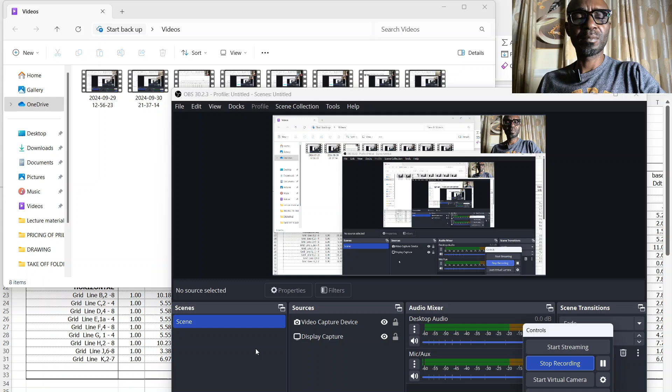Hello, we are here again in furtherance on how to use Excel to measure quantities.

A recap on the last video: we dealt extensively with the footings, and for the purpose of emphasis, we were able to extract the formwork, concrete, excavation, working space, backfilling, blinding concrete, and the excavation for 3 footings on the drawing that we are referring to. We also touched slightly on the trenches, which I feel we needed to discuss further for clarity, so that you can apply it and see if it is working.

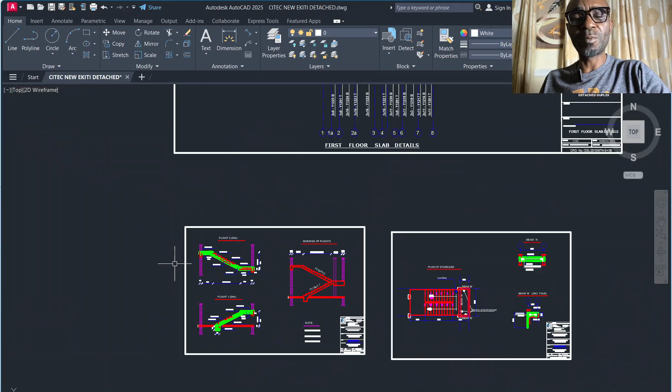We have a drawing that we're referring to, which is a duplex. As you can see, the drawings are gridded, both vertical and horizontal, and I was able to scale all the measurements of each of the grids for ease of reference.

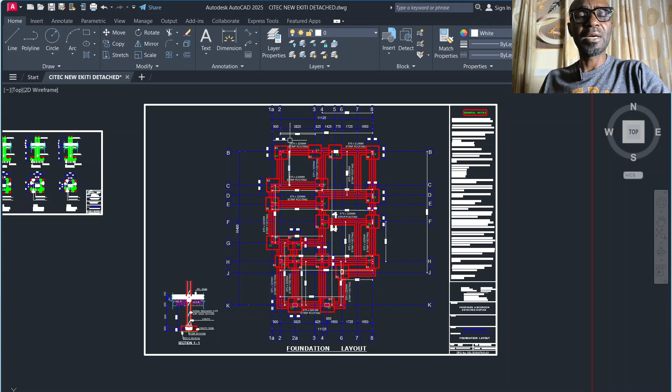We are going to start with the verticals. As you can see, we have grid 1A, spanning from C to G, and the length is 6.15. It has a B2 footing, with 3 B2 footings: 1 at the center, 2 at the extremes.

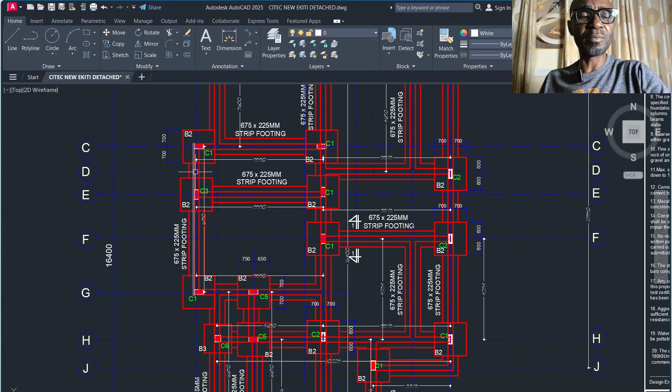For me now to get the length of the excavation of my trenches, I need to take half of this footing off at the end, and I'm taking all of this. Then I'm taking the working space of 600 to arrive at what I'm going to dig here.

Then for the block work, I'm taking half of this column to bring me to the edge of the column, and I'm taking half as well on the other side, and taking away all of this, because this portion will be occupied by the column going up, so the block is not going to go through. After deducting this, I'm going to get my clear length for block work.

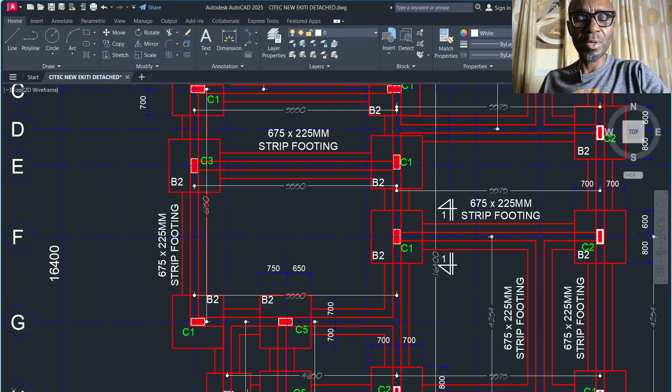Let us go to the drawing. This is 615. I have the column thickness, which is 150. I divide by 2, giving me 75, multiplied by 2, I have 150.

Then the column at the center is C3, which is 350 by width, so I took out this. Then I will arrive at the length of my block work, which is 5.65, as against the 6.1 that is on the drawing.

Then for my base deductions, I have B2, which has two halves, one at this extreme, one at that extreme, multiplied by 2, plus the one at the middle, plus 1.4, gives me this one. Then the working space is 4.

I'm deducting working space; the middle has 2, while the two ends have 1 each, that's why it's 600 multiplied by 4. Then this is what I'm deducting from 6.15, so what I'm left to dig is 0.95.

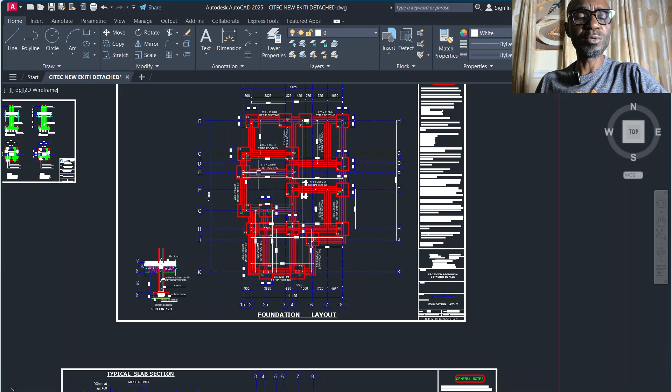Then grid 2, there is grid 2, which is B to C and G to K. B to C has one B2 column, one B2 footing at this end, and another B2 footing at that end.

So I'm taking out a 700, I'm taking out a 700, I'm taking out a 700, I'm taking out a 700, then I'll be left with...

Then I will now take out 600 for the working space, and I'll be left with what I'm going to dig here.

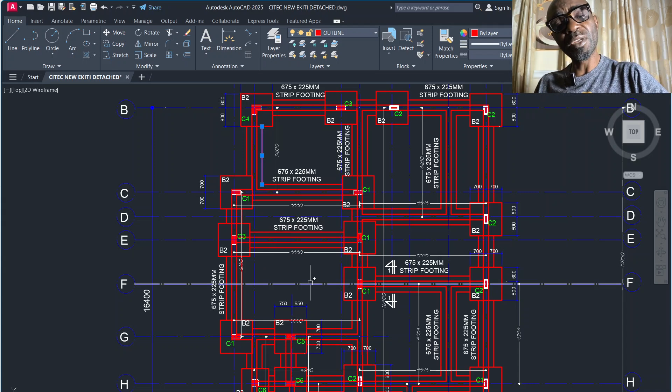Then equally on this other side, which is grid 2, G to K, I have one B3 at the center, and I have one C6 at the center. So I'm going to take out half the thickness of the column, half the thickness of the trench, and the full width of this and the whole of this column to get my block work.

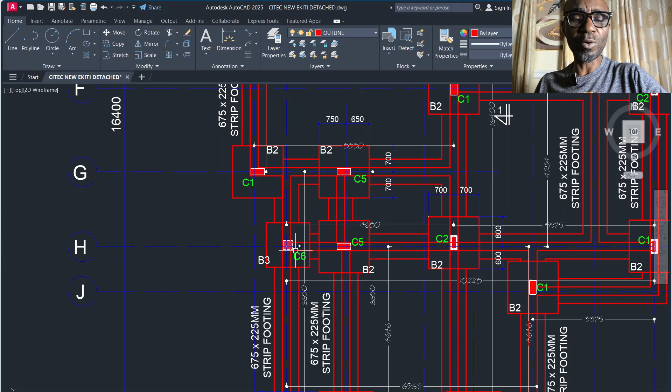If you come to grid 2, you see 3.6. I'm taking 0.75, which is the thickness of the column. Then I am taking the whole of the column at the middle, then I am taking the block work.

But it's supposed to be, let's see if I am correct. I'm supposed to multiply by 2. Right, I'm supposed to take 225, half there, half there, so I'm having 225. This is the same for B. Sorry, we're correct. Then this is for G to K.

GK. I have I'm supposed to take I'm having

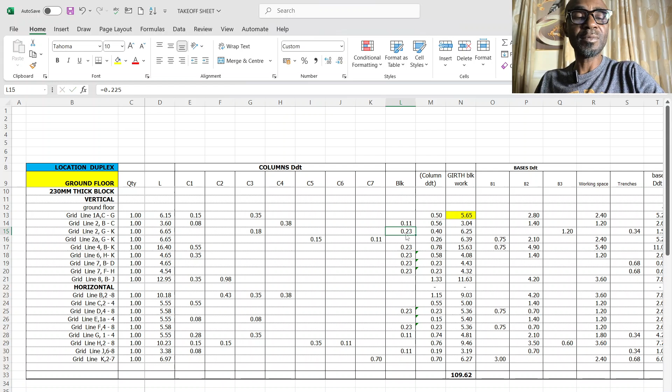I'm deducting this, so I'm left with my length for my block. Now it is 6.3, 6.39, as against 6.5, 6.65, while my excavation is 1.4. What is remaining is 1.4 to be dug in that axis.

So it is the same thing applicable. This is my own approach. You can approach it the way you have analyzed the result you want. So if my approach can be made easier by your own approach, it is good and fine.

It's just like a guide for you to understand what I am doing. Having said this, we'll quickly go to the other information. As you can see, I have the width of the trench here, the depth of the trench here, the height of the block here. Why is it different from the depth of the trench?

Because this is the depth of the trench, I took out the thickness of the strip footing, which is 225. I added 450, meaning that the building is going to be above the natural ground level by 450.

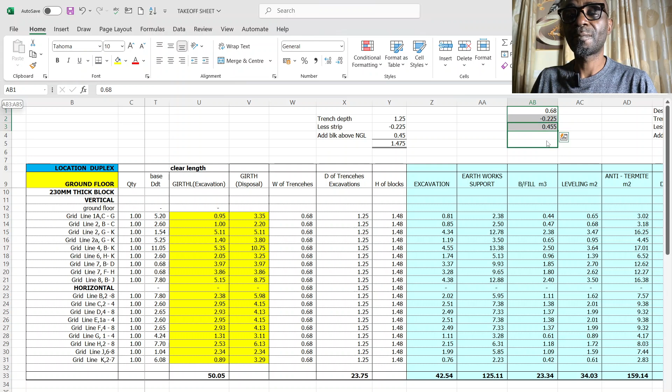So this is the backfilling of the two sides of the block where the block work is running through.

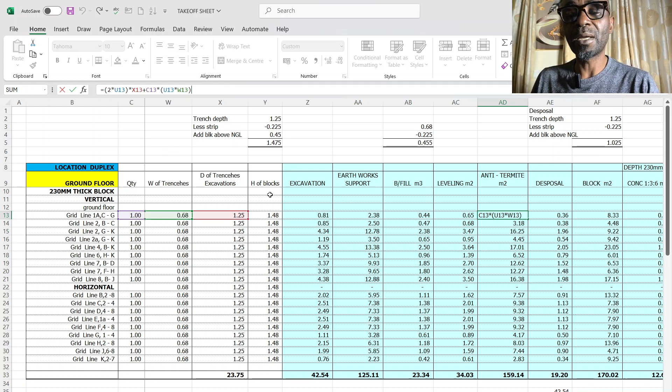Then level and compacting is, of course, the length by the width. Anti-termite is the bottom and the two sides, which I took time to explain the formula for during the pit excavation.

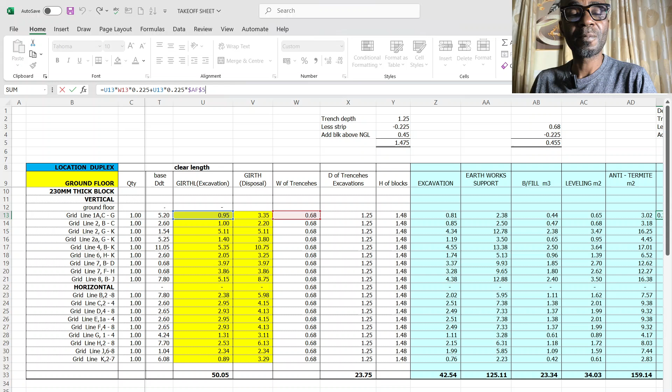Then disposal, it is now the strip, this length by this one by 225, which is the size of block, which is the thickness of the block, to get your disposal.

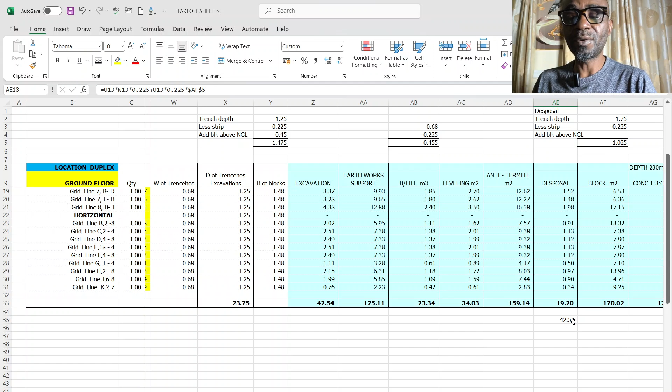So as you can see, if you drag your formula, if you add this to backfill, you should be able to get 42.54, meaning that you're correct because it is the exact quantity that you excavated.

And now you're taking the block, the area the block and the column, the concrete strip, is occupying, and you're taking it out of the site and disposing of that.

So now, having done this, let's quickly go to reinforcement, which is what we want to discuss extensively for today.

I did say that if you're given a bar bending schedule, you might be lucky to be given one where you just take the overall length, multiply by the quantity, and get whatever you want. But a situation where you're not given one and need to show all the workings, you must show how you arrive at the overall length and how you did the working using Excel.

I know we all know how to do that using the manual method, but using Excel is what we are going to be discussing now.

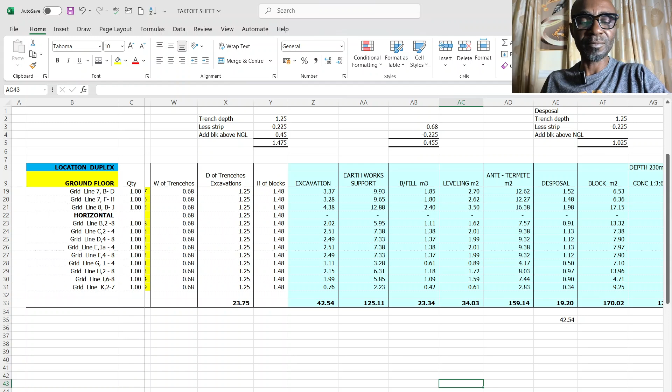As you can see, I have my calculation sheet where I have B1, B2, B3. Then I have the columns C1, C2, C3 up to C5, up to C7.

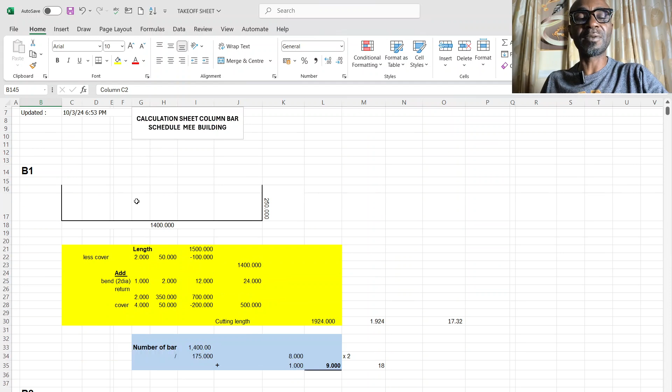What I did is first I draw the base, which is going to be your border line.

I draw the base, which is equally what is here. Then I create this calculation area where all I need to do is go to the drawing.

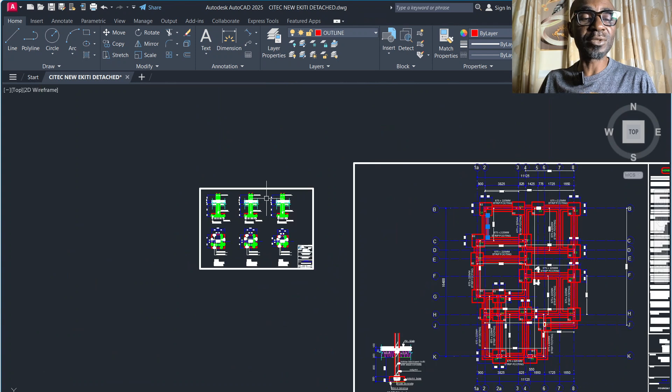What are the sizes of the bases? We have 1.5, 1.4, 1.2. So I go here, I bring the first, B1 is 1.5. I put 1.5 here, and the cover information says foundation cover is 50, column is 40.

I put 50 here, I put 50 here by 2. It gives me minus 100 from 1.5, gives me 1.4, which is the effective length. I click it, I bring it here, I get this.

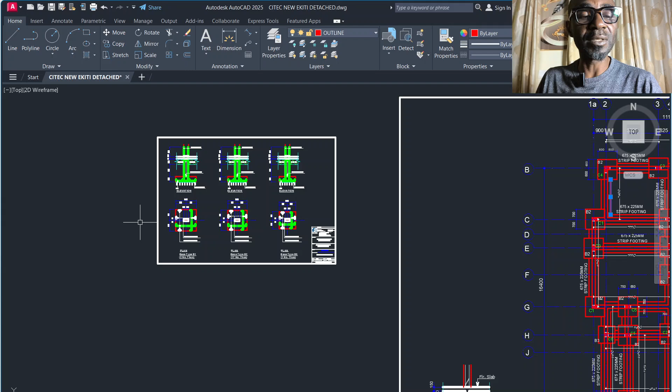Then now for me to get the upper return, it is 2 by 350. It is 350 here, 350 here, because the thickness of the base is 350. I have 350 here, 2 by 350, 700.

Then I'm taking out cover for 4 places, because one up here, one up here, one up here, one up here, making 4 by 50 gives me 200. So that is 700 minus 200, gives me 500.

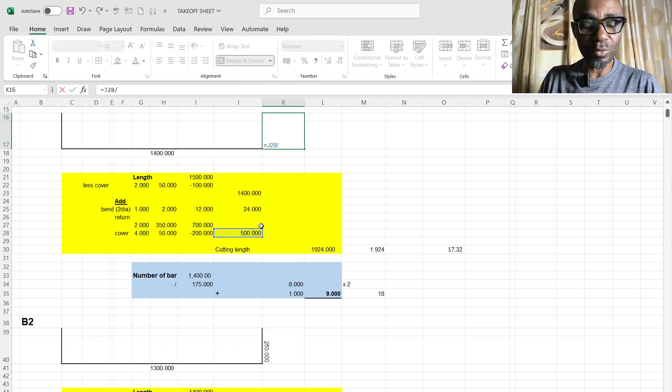500 divided by 2, I have 250 here, 250 here. If you do your manual computation, you'll see I am correct, because 350 minus 100, you're having 250. Then I link this by this, I divide it by 2 to get this.

Then for me to get the number, since it is a square, it is a square reinforced footing, I click this, I took this effective length now.

Then the center to center is 175. Divided by 175, I have 8 plus 1, making 9.

If the footing size is not the same, say let's say this one is 2 meters, let's say this is 2 meters, then the only thing that changes here is this one. So now we are going to have two different numbers, because the footing is not the same.

It's rectangular, one side is longer than the other, so you cannot multiply by 2 in this manner. Since it's a square both ways, that's why I got this size and multiply by 2. But since it is now rectangular, you have to have 2 different bars, because their lengths are not the same, and even their quantity will not be the same. So you have this. But in the case of what we are dealing with, it is the same.

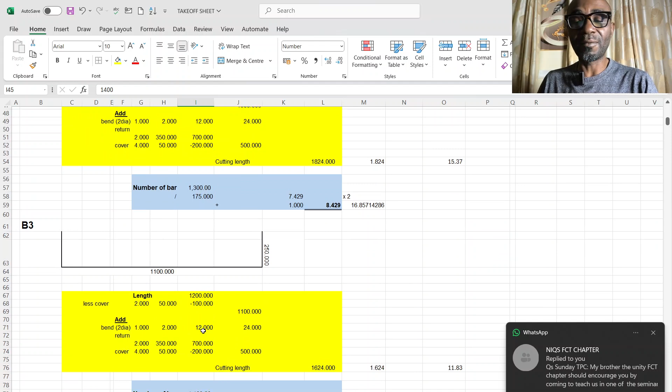So I delete this back. I click this, I pick this now. The same thing I did on B2, 1.4, which is the length, I have this. Then I have 1.2, I deduct this and have this, and it is both ways.

Then for me to draw this, I just want to show how to still draw using Excel to draw your shape. Take this out. What I did is you drag this, you close the cell so that the other one can, you just go to your border, pick the size of what you want.

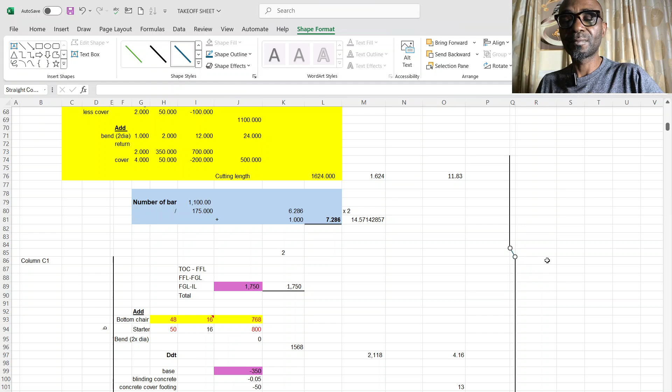Okay, then you come up here, pick the size, then you go to your insert, you check shapes, pick this. So you can see you already have your shape of your reinforcement.

So you can use Excel to sketch some of the things you want to illustrate, you want to project, so that the person interpreting your document will actually know what you're doing.

Then, having done this, we'll now come to the column. The columns now are this, you go to your drawings. The columns are going to project a starter, you're going to have starters above.

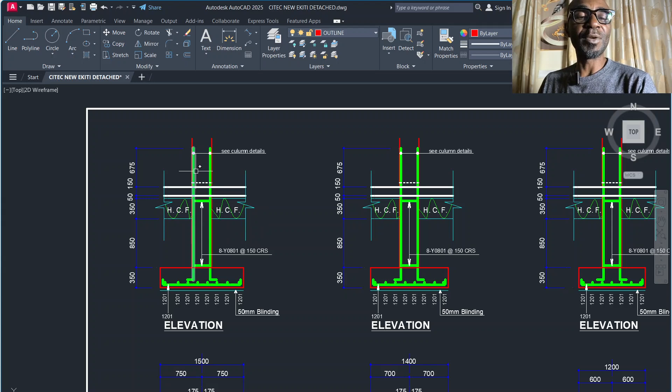Here they told us what the starter will be. But in the case where you need to use the conventional formula to get your starter, it is 50 by the diameter of the bar.

So now, if you're not given this return length, there is a universal formula you can use to get your development length: 48D, meaning your measurement for the steel will take effect from the top of the concrete here up to the top of the concrete there. Then for this, you use 50D to get your starter. Everything inside the concrete to the chair, you use 48D.

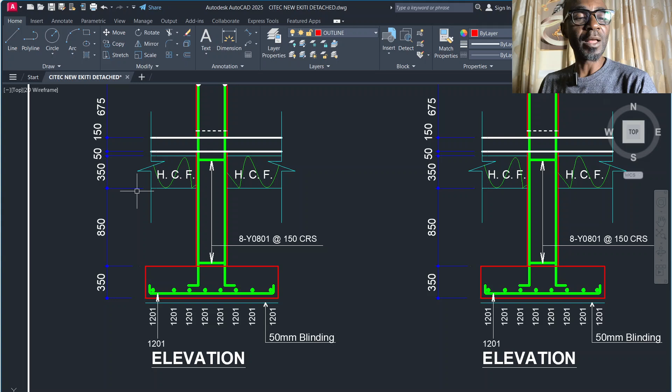So let us go to the sheet. From invert level to floor ground level, the length is 1.75. For the bottom chair, I'm using the development length of 48 by 16, while the starter bars are 50 by 16. I have this.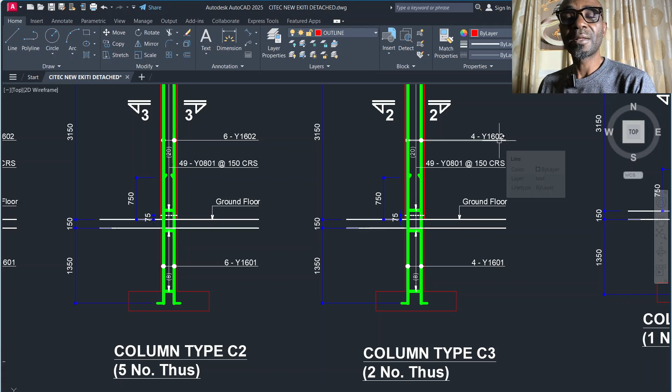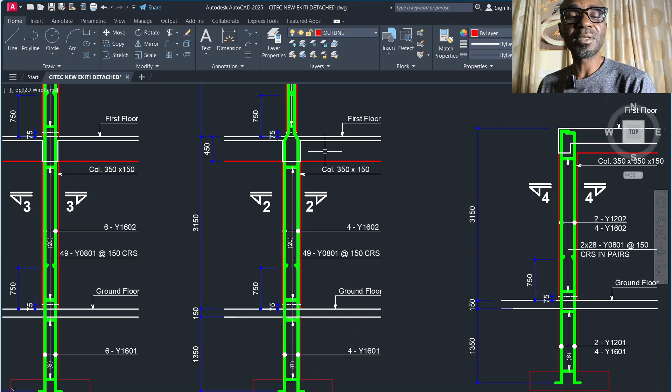They are all 16mm diameter bars. Here they are saying 4. Why are they showing us 6 bars here? 1, 2, 3, 4, 5, 6. So there's a discrepancy. For C3, they are using section 3, section 2, section 5.

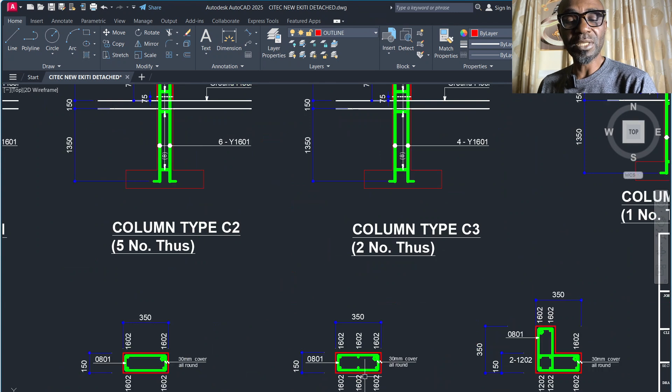3 is C2, C3. So if you have such discrepancy, you need to get clarification from your consultant, because this is section 2.2, this is section 3.3. Meaning for column type 2, we have this section, which is 3 bars, and for column type 3, we have 4 bars.

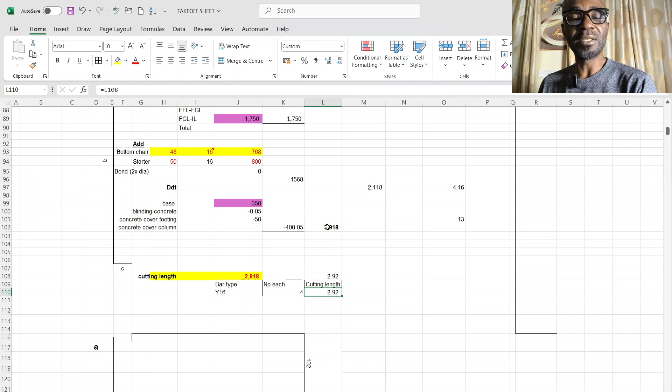So there's no discrepancy. Now we come to this place. I have 4 bars, and the length is 2.918. Then I come to the stirrups.

The stirrups are 350. I have 350 here. I am adding the bent, which is twice the diameter. The diameter is 8mm. So minus that, then you less the cover of 40, twice 40, you have this for the longer side. Then for the depth, for the other face, I have 150 thick.

Then I deduct all the deductibles. Then I am supposed to add the bent. So I add bent, then I less covers. I now have this length, multiply by 2, I have this. Then I have this return, which is this portion here, 2 by 50 is 100. I add them together, I'll have 908 as the effective length.

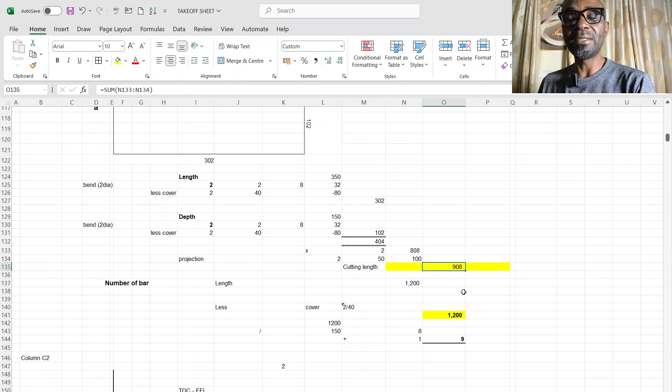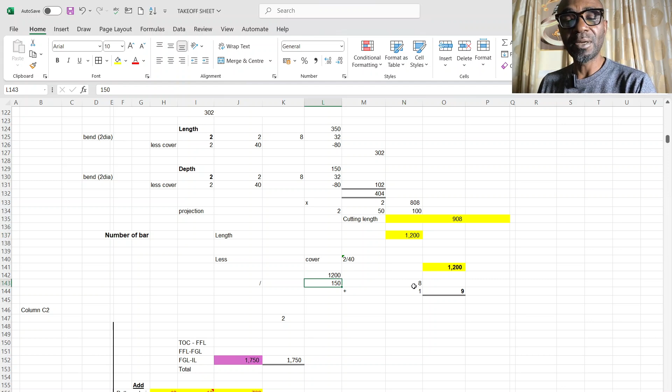Then here is the span where the stirrups will occupy, that's 1.2. At a center of 150s, you have 8 plus 1, making 9 numbers. So the same thing you repeat on all the columns.

So if you understand this, you can do the rest of the columns. What I did is, first I got this length, from top of the ground floor to the bottom of the footing. Then I added the starter, I added the development length. I deducted the thickness of this column, the thickness of the footing, took off the cover, and took off the PCC, and arrived at the length.

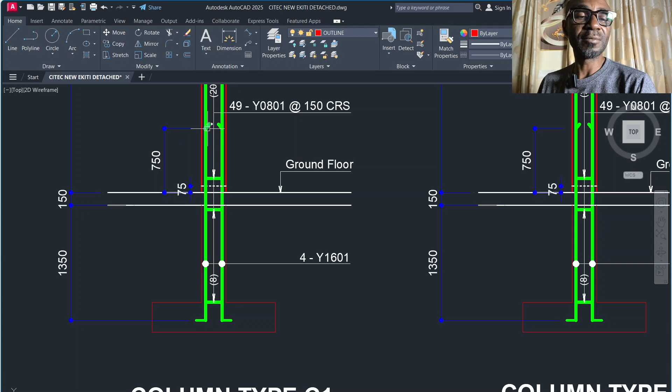Here, see, there are discrepancies. They are giving me 750 as the starter length, while on this area they are giving me 675. So there is a discrepancy. But for this exercise, we are only trying to educate ourselves on how to extract this and use the conventional formulas to get some of the missing information that might not be on the drawings.

Like if the starters are not given, you have a conventional formula to apply. If the bottom here is not given, you take the development length from... I'll give you an example. This is my footing.

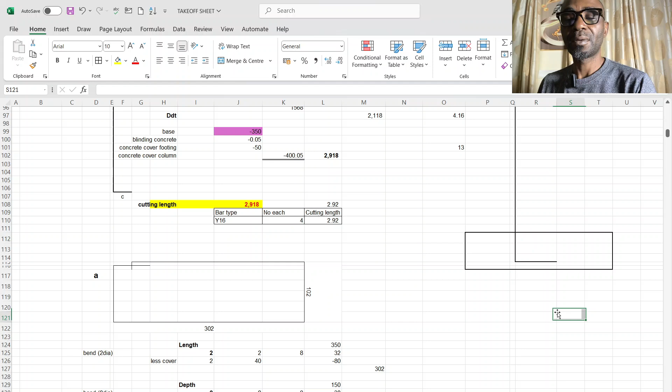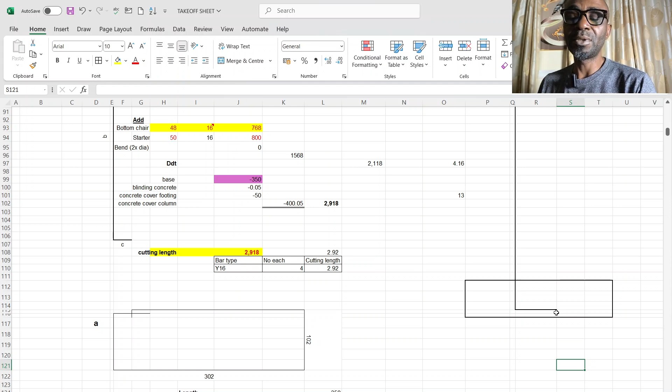This is my footing. I'm supposed to take my effective length from here to the top of the grid slab. Then I will use 48 times D by 48 to get from inside the concrete up to this point. And that is what I got here.

So now we'll go to the bar bending schedule. If you're working on projects, there are times you're expected to submit your bill for payment with backup documents - all the measurement sheets, checklist, bar bending schedule for proper checking. Imagine if you needed to submit your backup sheet and prepare a bar bending schedule, doing takeoff manually - you can imagine how taxing and difficult it will be. If there are errors, you start cleaning or rewriting, using your calculator to punch numbers. But with Excel, as soon as you discover any error, once you correct it, the whole thing will be corrected instantly. That's why it's good to learn how to apply Excel in measurement.

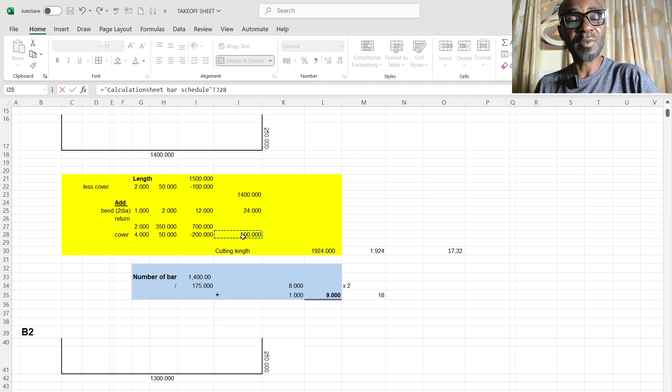So now I draw the same shape. I press equals to, I go to my calculation sheet. I pick the effective length here, then I come to this area, I pick the 500 divide by 2. I have 250 this way. Then I click this side to pick this same 250 here, and I go to here, the number of footing, base 1.

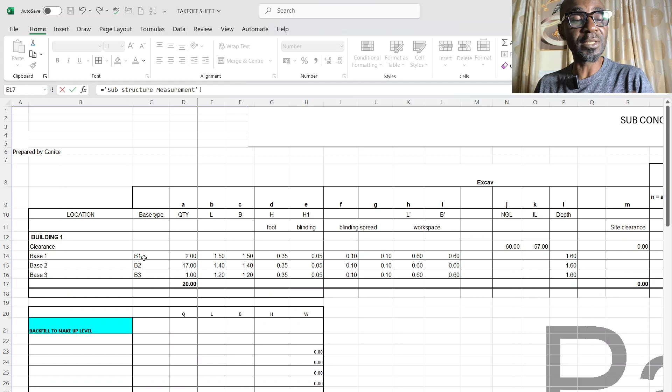Where do I get it? I have to go to where I measured my base. Where I measured my base, we said the B1 quantity is 2. I click 2. Then how many bars are in one footing? It is 18 because it's both ways - 18 as against 9. If it's 9, I have to multiply by 2. So 18. So I have my 250 this way, then this one, then my effective length as 1.9. The total length is the number of footing multiplied by number in each by 1.9.

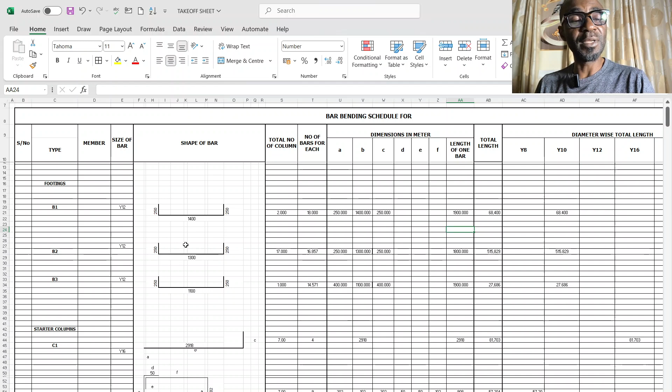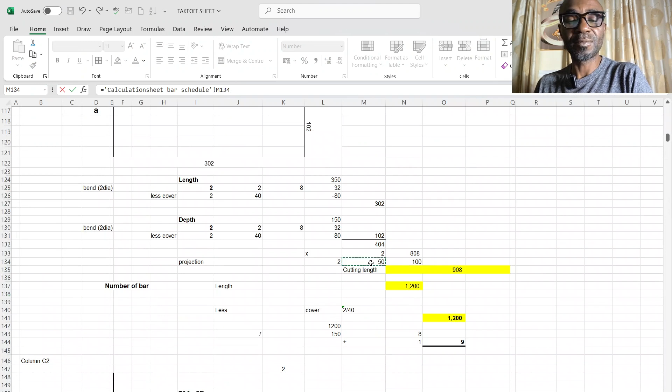So the same thing is repeated in base 2 and base 3. Then you go to your column, you pick this effective length, your stirrups, you pick the effective length, then you pick your 50 here, which is the return. So now you have all of this. This one twice is reflecting here and here. This one and this one is reflecting here and here. Then your returns this way and this way is reflecting 50-50.

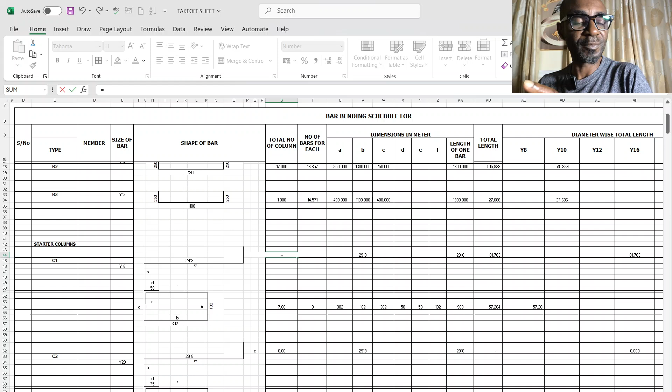You have effective length of 908, and the number of columns are 7. You go to where you measure your column. C1 is 7, you click. Then how many numbers are the bars? You go to your foot 1, it's 4 numbers. You click. So this is what you repeat for each one.

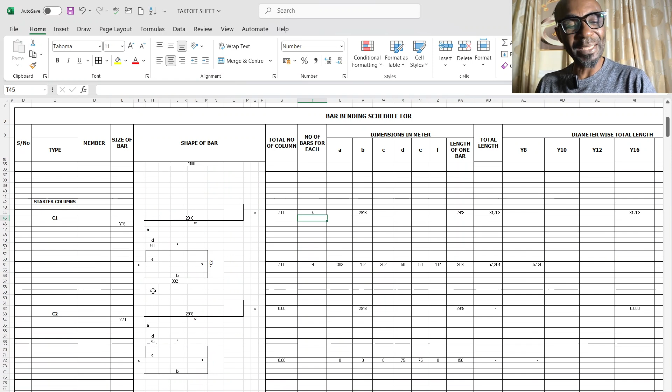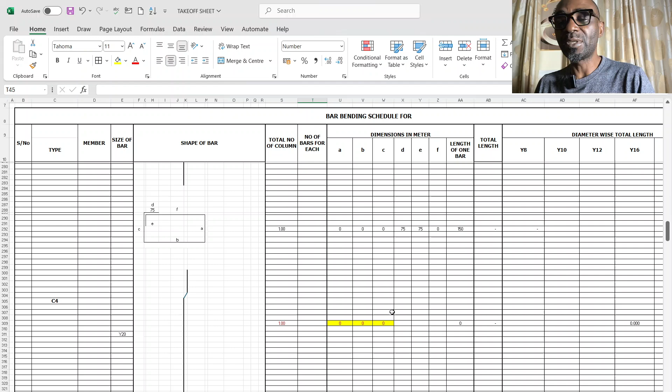Till you get to see instantly - if you go to the extreme, you'll be seeing your quantity in real time. You see your quantity, Y8 I have 22.6 kg. Then this other one I have 376.9 - a bit... oh sorry, kg. Oh, it is ton. Let's see if I've converted it from ton to kg, or from kg to ton. So we'll be talking about 27. Let's divide it by...

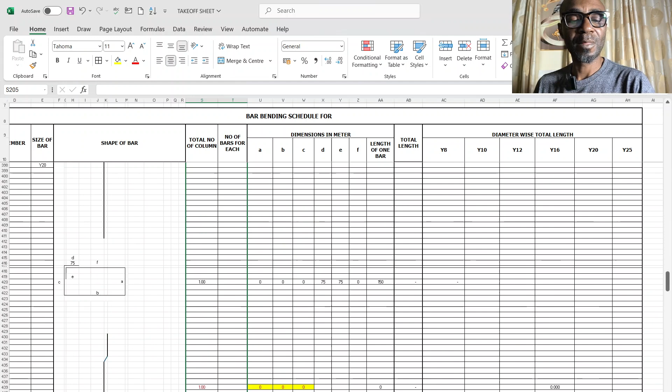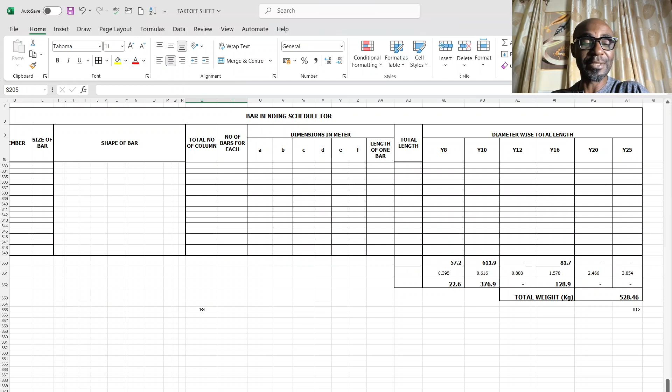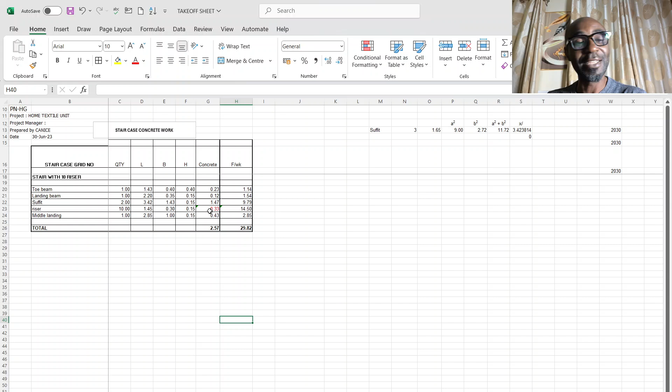You can see the thickness coming out. So let us quickly measure the staircase. It is interesting if you use Excel to measure your staircase. See how small it is - you have finished measuring the 2 flights, the first and the second flight, in this small thing you're seeing on the screen.

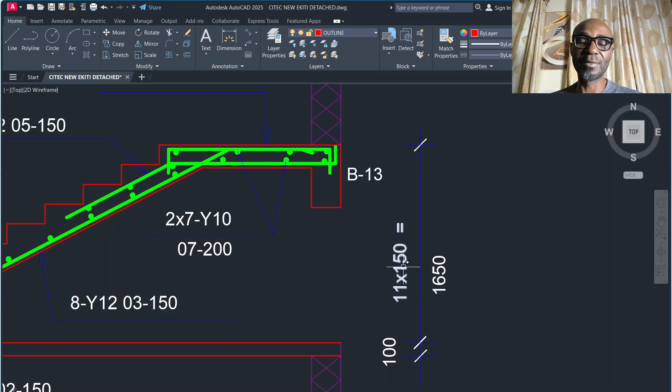The first is you establishing this formula, which you get from the computer. You establish formula, you go to your staircase and get the information. The length of this is 3 meters. There are 10 risers by 10 tread, by 300, it gives you 3 meters. Then the height is 1.65, it's 11 risers.

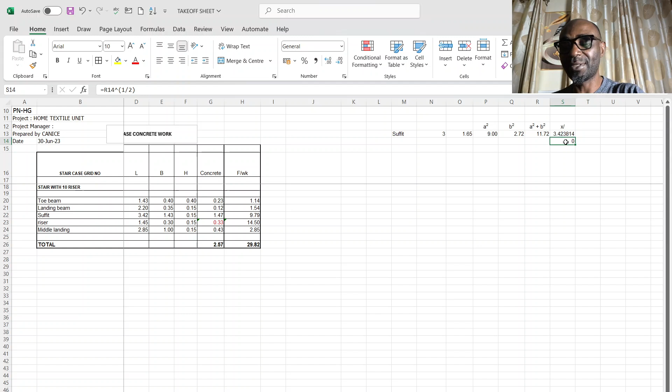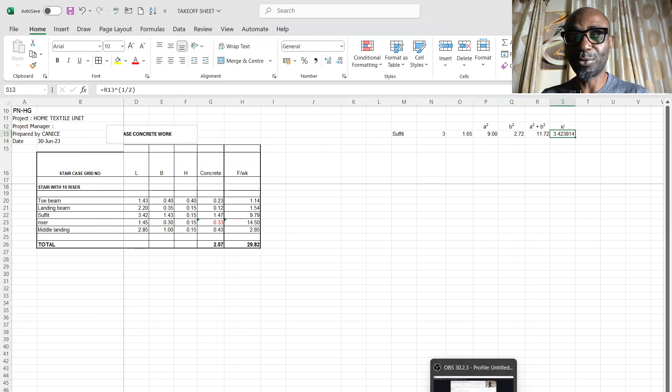So I just come back to this area. I put 3 meters, I put 1.65. Immediately I have the slope - I have the length of my slope, which is 3.423814. If you're doubting it, you can fact check me, use your Pythagoras theorem to check if the formula is correct. So 3 point... as soon as you get this, you go to your step.

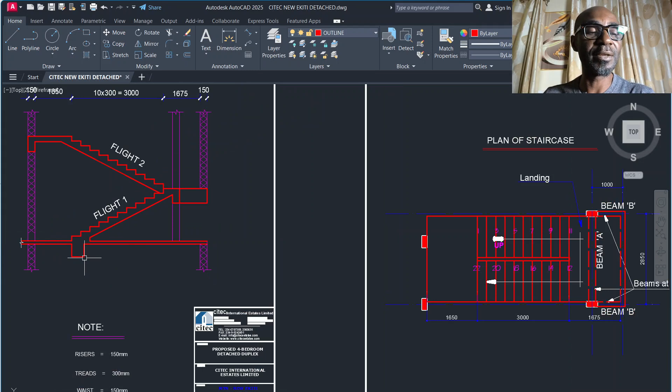What is this span of the step, which is 2.85 divided by 2 to have one side of the flight. Then the beam length is 2.85. You have a toe under here, and your toe is 400 by 400, and your treads are 3 meter by 300 by 150 riser.

So these are the informations you need. You come back to your toe beam length is half of the width of the step, half of the width of the stair hall, gives you 1.43, and the thickness of the toe is 400 by 400, then the concrete will be 1.43 by 0.4 by 0.4, gives you 0.23 cubic.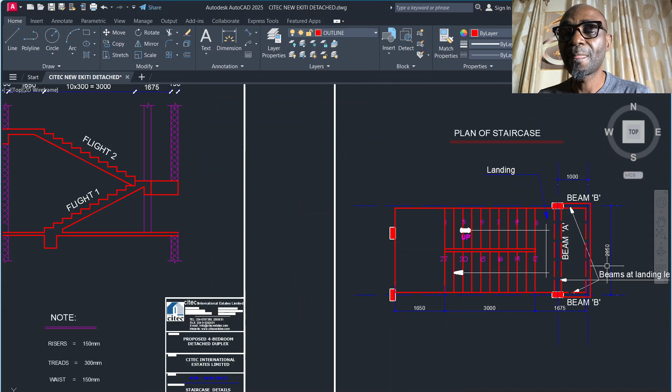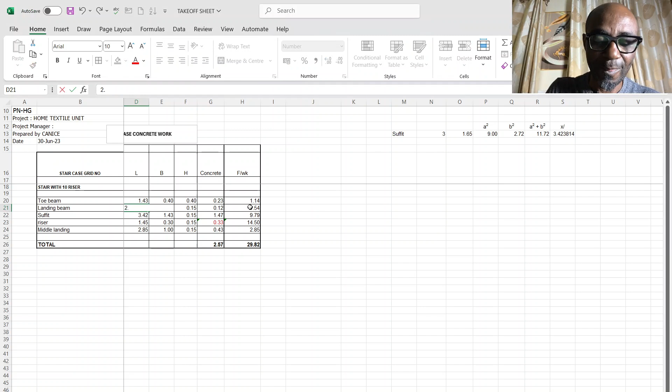Then the landing beam is 2.55. Let's check the landing beam. Landing beam is this 2.85. 2.85 minus 1.5 is now 2.85 minus 0.15. So you have 2.7.

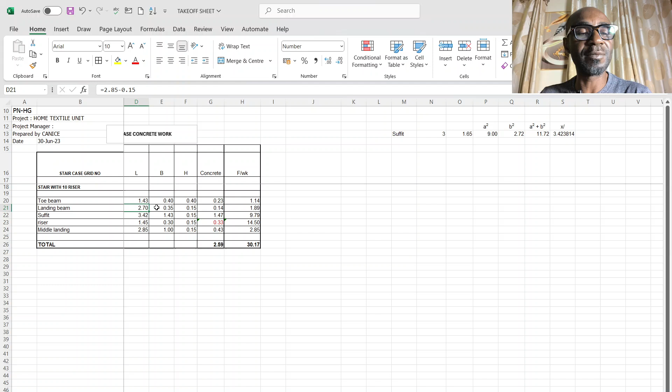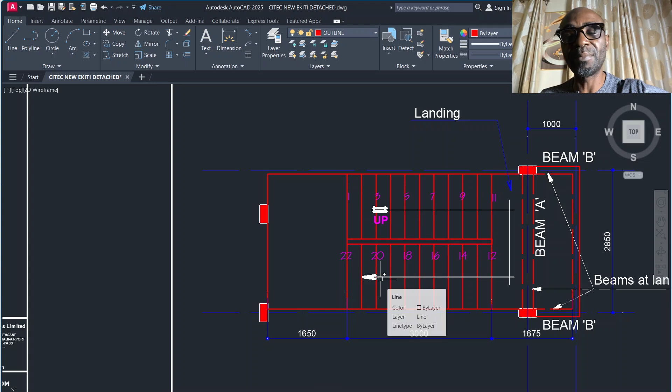And the beam is 35 depth by thickness of 150, and the number is 1. Then the soffit, there are two because they are equal. They are equal, so this and this, they are the same length. So that is why I have two here, by this answer from this formula, by the width.

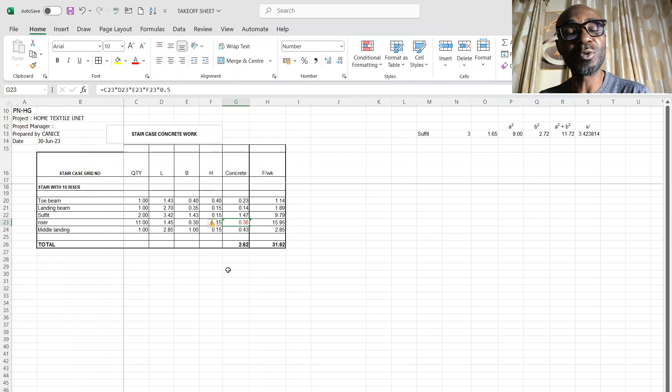Then the formula changes here, because that's why I have to put color here, so that I will not mistakenly drag this special formula to another cell and get a bad result. So that is why if I have any special formula in a particular cell, I color it, so when I see that color, I know something special is about that formula.

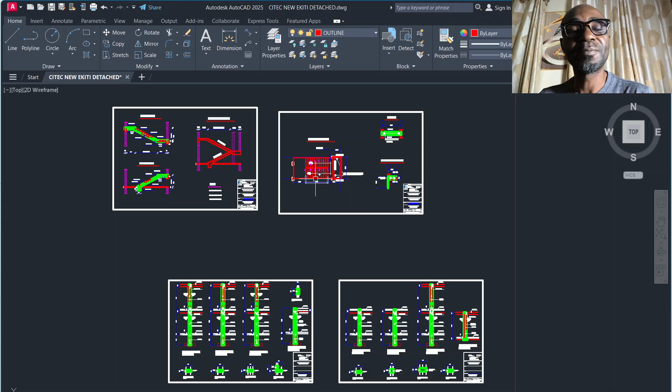You see, I took the formula and multiplied the number of risers by the width of the step by 300, by this, divide by 2. And why did I do that? Let's go to the step. It's like... I took...

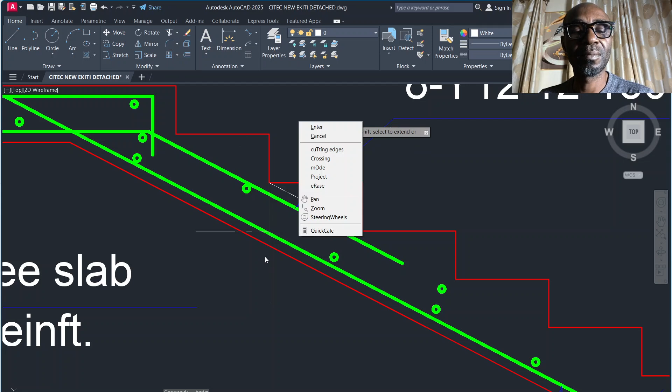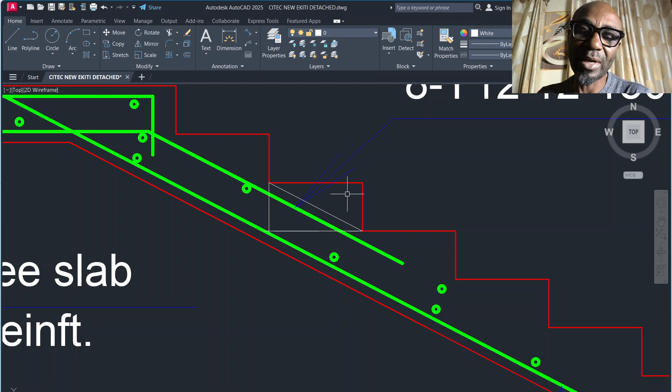It's like me taking this rectangle and dividing it by 2 to get this concrete here, because I have measured the waist from this edge to the bottom here as 150. So I am taking this one separately. So that is what this 0.5 represents.

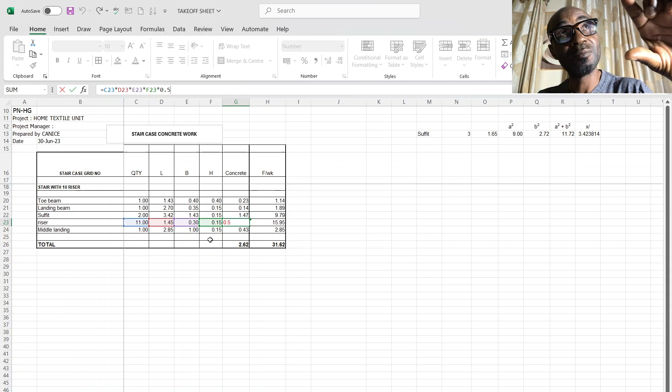So I'm taking the rectangle, dividing by 2 to give me the quantity of one tread, then multiplying by the number, which is 11. So I have 0.3 something. Then the landing, of course, is 2.85 by 1, by the thickness, I have this.

Then the formula for the formwork, the toe is 2 sides. So it is the length by the height, which is supposed to be this, not the breadth, by 2.

Then the landing beam, this is supposed to be 35, and this is supposed to be 0.15. So it's supposed to be, take this by the height, which is 1.8.

Then the soffit is, of course, the length by the width of the step. Then the riser in meters, the number by the width of the step, while the middle landing, like the landing is 2.85 by 1 and all.

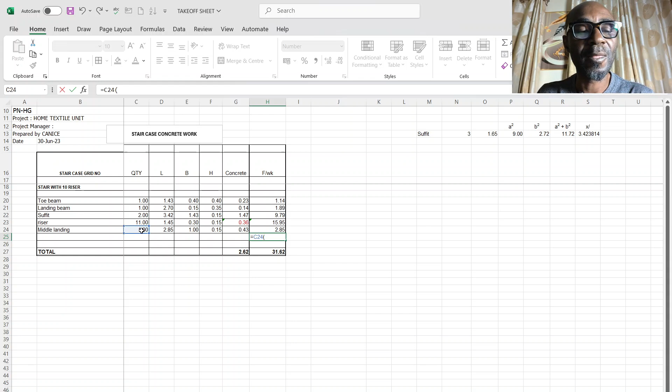Then you want to get the edges of the landing. If it's not enclosed with the block, it will be this times this, plus 2 times this way, times 0.15 for the formwork.

So as you can see, in less than the space of 2 minutes, I've been able to measure my step, the formwork, and the concrete.

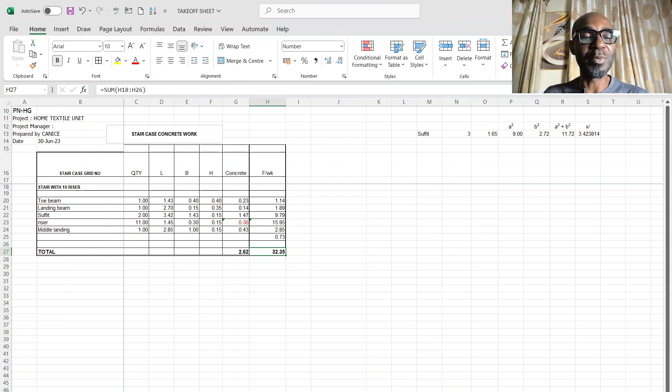What is remaining is just the reinforcement, which if you apply this method I just showed you here, you'll be able to do that as fast as possible as well.

So the next video will be discussing how to measure finishing items, using another template which I've prepared, where what you just need to do is pick your information for the sizes of the room, put your information for the openings, and your quantity will come out.